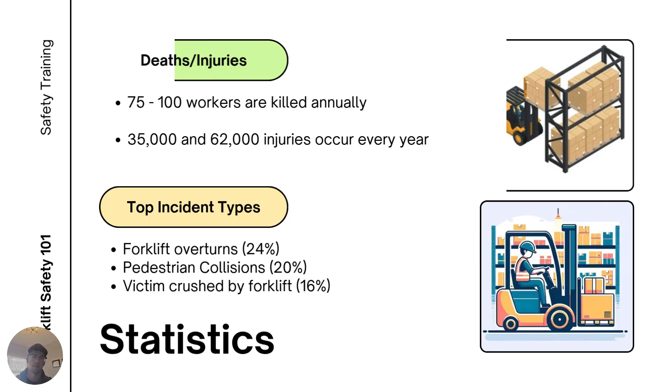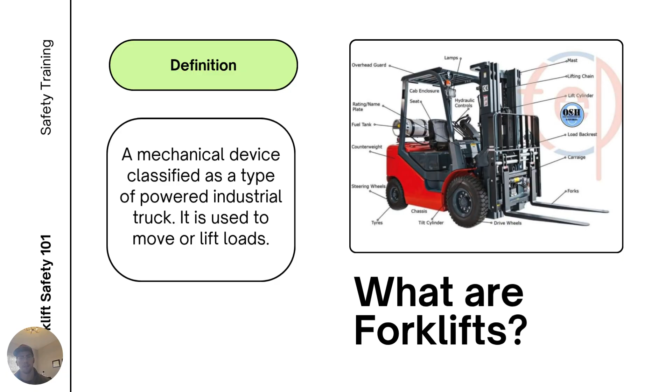So let's meet the warehouse workhorse, or the forklift, as we all know it. It's a powered industrial truck designed to lift, move, and stack heavy loads, saving backs and boosting efficiency. With forks, a mast, and serious lifting power, it's no toy. Forklifts can weigh more than a car and handle even heavier loads, so they demand respect and proper training. We'll cover the types, how they work, and how to operate them safely. No donuts and no demolition derbies.

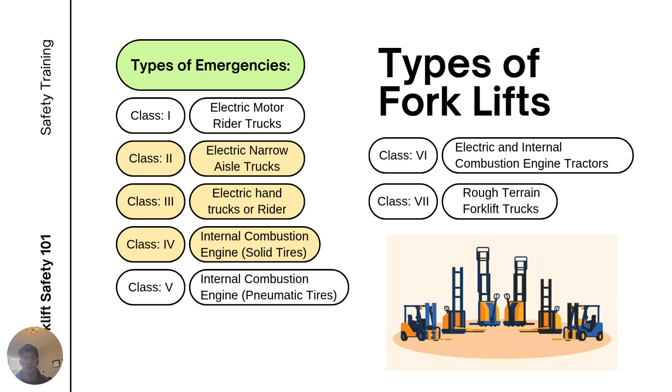Forklifts come in 7 classes, each built for specific tasks. Classes 1 through 3 include electric models for indoor use, riders, narrow aisle trucks, and pallet jacks. Classes 4 to 5 include internal combustion trucks, cushioned tires for indoors, and pneumatic for outdoor terrain. Classes 6 and 7 include tow tractors and rough terrain forklifts, built for pulling and rugged environments. For this training, though, we'll specifically focus on classes 2, 3, and 4. These are the types used across the Albion Dexter campus.

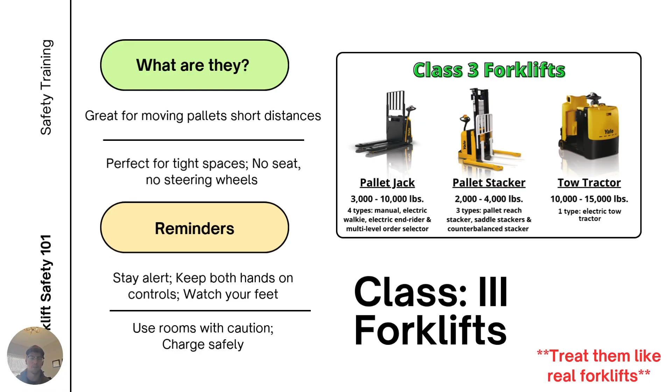Moving on to Class 3 forklifts, your low lift legends. Electric pallet jacks, or stackers, do the grunt work on the ground. They're great for moving pallets short distances, and perfect for tight spaces and indoor use. No seat typically, and no steering wheel, just walk behind or ride on. They're simple, efficient, and surprisingly strong for their size, kind of like the forklift version of a dependable sidekick. As a reminder, make sure you treat them like real forklifts. They may be small, but they can do a lot of the same things that the larger forklifts can also do.

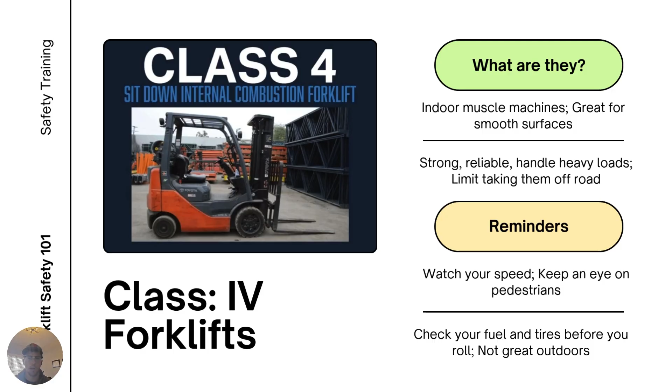The last one we'll deep dive is the Class 4 forklifts, your indoor muscle machines. They're powered by internal combustion and rolling on cushioned tires. Great for smooth surfaces like warehouse floors, strong, reliable, and built to handle heavy indoor loads. Just don't take them off-road unless the manufacturer says it's okay. Those cushioned tires aren't typically built for outside terrain. Think of them as a warehouse workhorse with a little engine growl, powerful but best kept inside.

Now, before operating, inspect your forklift every shift, no exceptions. OSHA requires it and keeps you and your team safe. Use the company checklist and operator manual for the lift to check key systems like brakes, horn, tires, and hydraulics. If something's leaking, broken, or making weird noises, report it. Don't fix it unless you're qualified.

Your inspection helps prevent accidents and keeps maintenance records up to date. So inspect before you wreck. It's the first step to a safe operation.

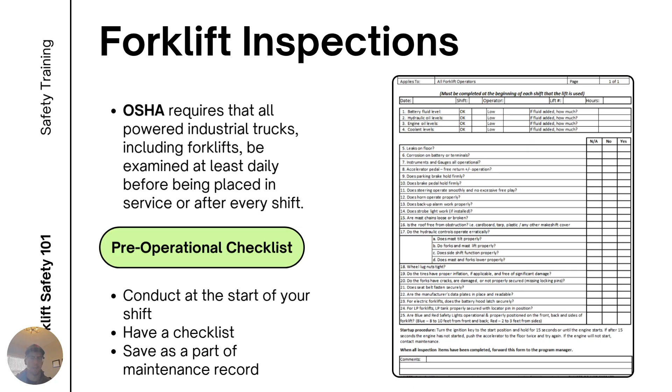Before getting in the seat, do a walk-around check, your first line of defense against breakdowns and accidents. Starting with the tires, look for damage or low pressure, especially on pneumatic types.

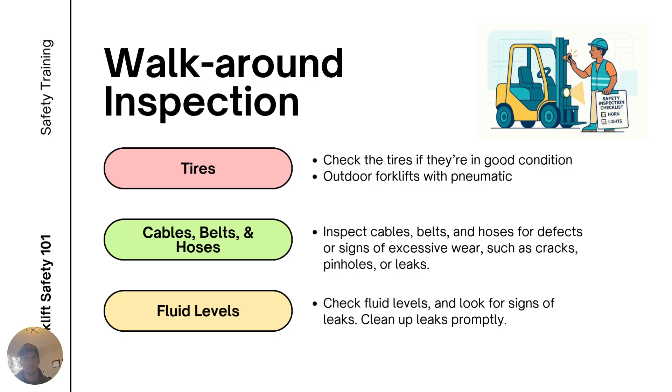Next, check cables, belts, hoses for cracks, leaks, or wear. And then fluids. Inspect oil, hydraulic fluid, and look for leaks under the forklift. If anything looks off, report it. Don't operate a forklift that's not 100%. Safety starts before the engine does.

Continuing on with the walk-around inspection, check the power source, whether it's gas, diesel, or electric. Check for leaks, wear, or loose connections. Strange smells or melting parts, report it immediately.

Inspect the forks, mast, backrest, and overhead guard for cracks, dents, or damage. These components do the heavy lifting and must be solid. Make sure the data plate and warning labels are clean and readable. If they're missing or obscured, that's a safety issue.

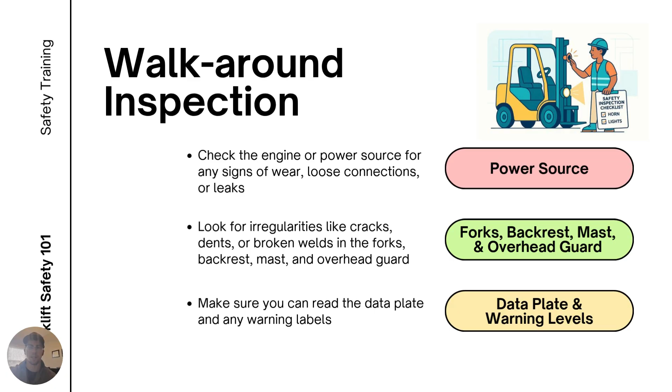So the bottom line is this inspection helps you catch problems early. Take it seriously, and yes, you can still look cool doing it.

After you walk around, hop in and buckle up. Seatbelt first. Make sure it latches securely and isn't damaged. Start the forklift while seated, then check gauges, warning lights, and fuel or battery levels.

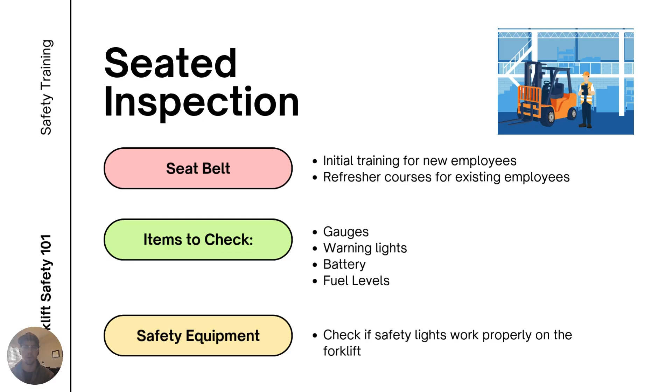Flashing lights aren't for decoration. They're telling you something's wrong. Test safety equipment like lights and alarms. If they're not working, you're invisible, and that's not safe in a busy warehouse.

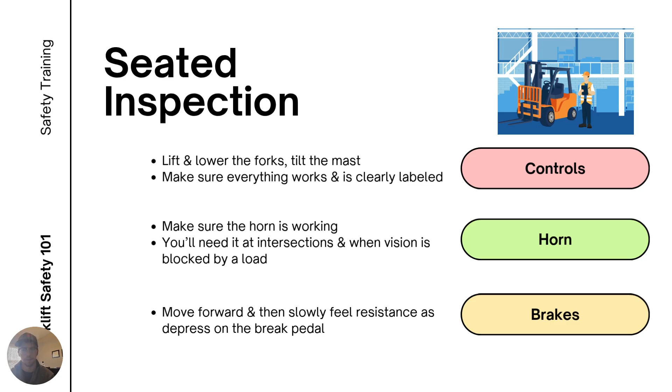Test the controls. Lift, lower, tilt. Make sure they respond smoothly. Labels should also be clear and easy to read. Check the horn. You'll need it for blind spots in busy areas. Make sure it works. Finally, test the brakes by moving forward and stopping. Should feel firm and reliable, not like a thrill ride.

Next, check the steering. It should feel smooth and responsive, not loose or stiff. Test the parking brake. Set controls for neutral and check the floor for any leaks. Puddles could mean hydraulic problems.

Inspect the exhaust system for sparks, smoke, or odd noises. Anything unusual, be sure to report it. If everything checks out, you're good to go. If not, tag it, keep it out of service. Safety first always.

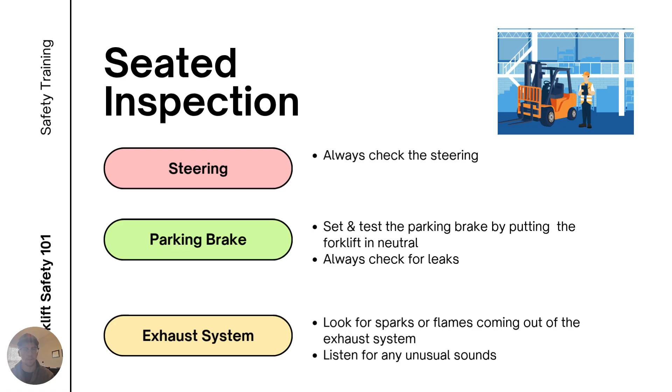Now, before lifting anything, follow these 3 essentials for safe forklift operation. First, wear PPE. Whether it's hard hat, safety glasses, steel toes, earplugs, whatever, make sure you're wearing what applies for your building. Whatever your site requires, it's protection, not a fashion statement.

Next, use 3 points of contact. Always have 3 limbs touching the forklift when you're getting on or off. Stay stable, stay safe. And then buckle up. Seatbelts save lives during rollovers. Click it every time you're in there. These basics prevent accidents and keep operations smooth. Skip them and you're inviting trouble.

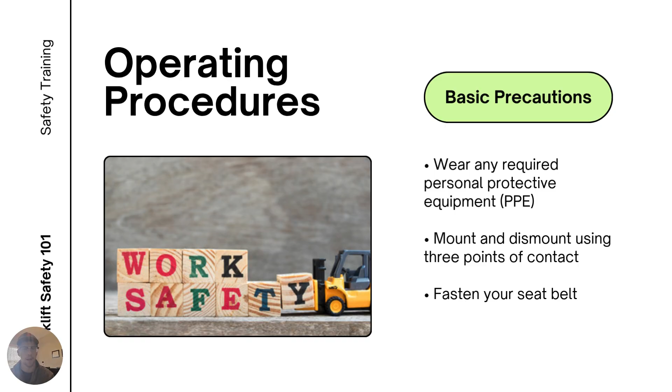Let's talk about how to drive a forklift like a pro, not like you're auditioning for a warehouse action movie. So the operation basics include steer with care. Rear wheel steering means take wide turns.

Know your data plate, which is pictured there on the top left. It tells you what your forklift can handle, amount of weight it can lift, how much it weighs itself, the size of your mast, a lot of different things.

Read the operator manual. Yes, really. This should be at all times stored on your lift. Always look where you're going, not where you hope to go. And keep a clear view of your path.

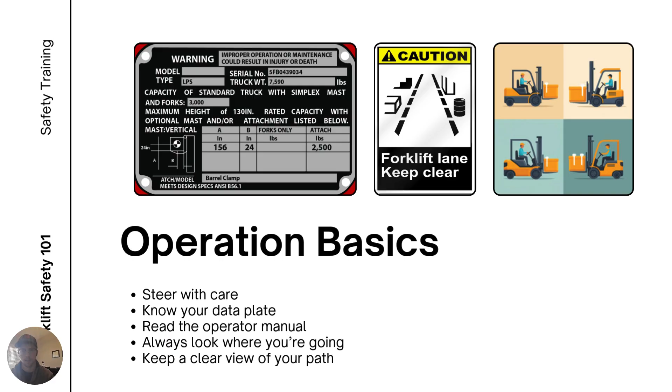No guessing games. Now let's look at driver guidelines. Keep arms, legs, and heads inside the forklift at all times. This is not a roller coaster. No stunt driving. Forklifts don't drift.

Your forklift and your coworkers will thank you.

Let's talk about keeping things upright, because tipping a forklift isn't on anybody's to-do list. So know your stability triangle. It's the invisible zone that keeps your forklift balanced. Stay inside it and you're golden.

Always keep the forks just a couple inches off the ground when carrying a load. High forks equal high risk. And remember, stable load means a stable forklift. If it looks sketchy, fix it before you move it. Balance isn't just for yoga, it's forklift survival.

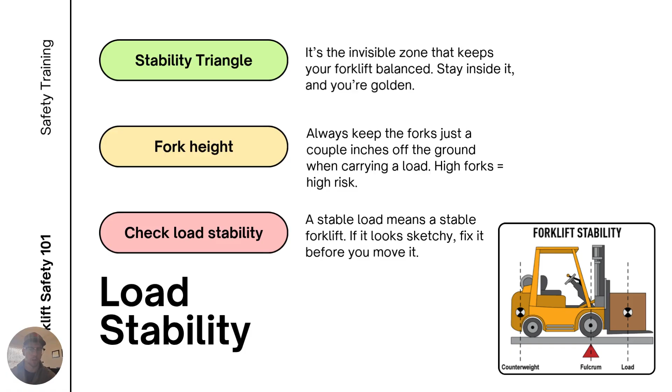Forklifts balance on a stability triangle. This is formed by the front wheels and the center of the rear axle. If the center of gravity stays inside that triangle, you're stable. If it shifts outside due to heavy loads, sharp turns, or ramps, tipping can happen.

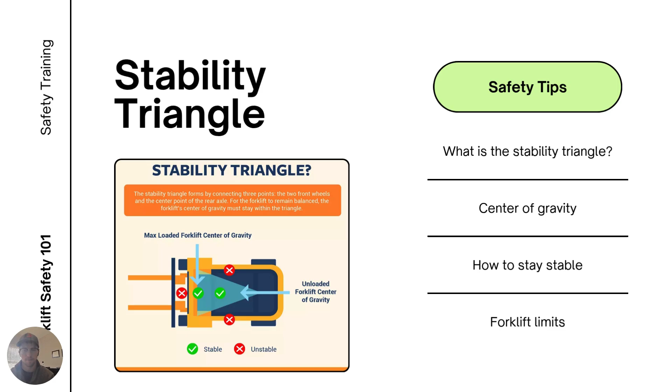Stay stable by keeping forks low while driving, centering and not overloading your load, avoiding sudden turns or rough surfaces, and knowing and respecting your forklift's limits. Stay inside the triangle, and then you stay upright.

Let's hope it never happens, but if your forklift happens to start tipping, here's what you need to do and what not to do. Wear your seatbelt, it's your lifeline. Hold the steering wheel tight with both hands, no flailing arms. Keep arms and legs inside the cage. Do not try to jump out.

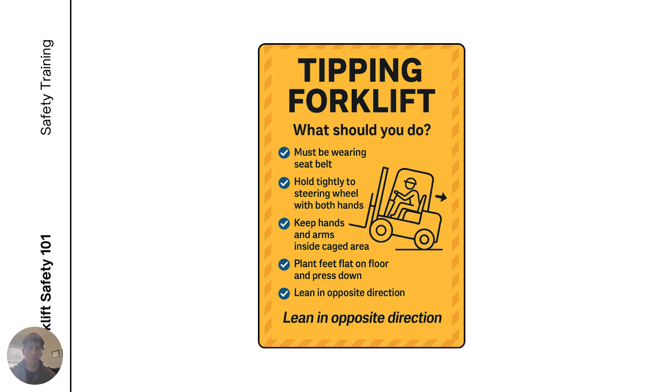Feet flat and press down. This allows you to brace yourself for impact. Lean away from the tip, shift your weight in the opposite direction to avoid contact with the ground. And remember, jumping out is the worst move.

Before you scoop up that pallet, know what you're doing with it, or know how to deal with it. A light balanced load is your best friend. A heavy off-center one, not so much. Check the weight, is it within your forklift's limits?

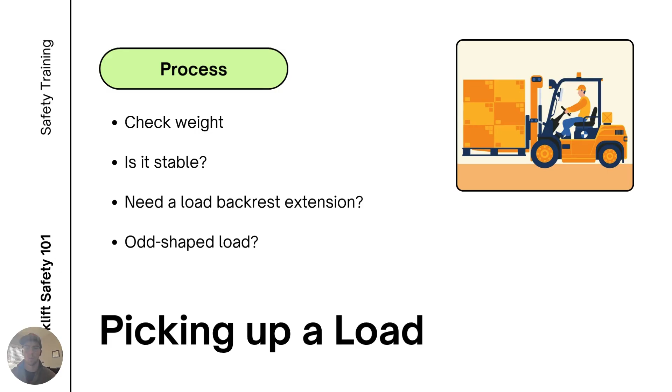Is it stable? If it's wobbly, restack it or wrap it up tight. Need a load backrest extension? Use one if there's any chance the load could fall backward. Odd-shaped load? Know how it's stacked and where it's going before you lift.

Now look up, seriously. Watch for pipes, lights, or anything that might not appreciate a surprise forklift hug. Forks wide and low, then slowly slide under the load. If it's stable, tilt it back and lift. If it's sketchy, lift a little first, then tilt gently.

Backing out of a rack, go slow and watch your surroundings. Once it's up, lower it to travel height, just a few inches off the ground. No need to parade it around like a trophy. And remember, smooth moves equals safe moves.

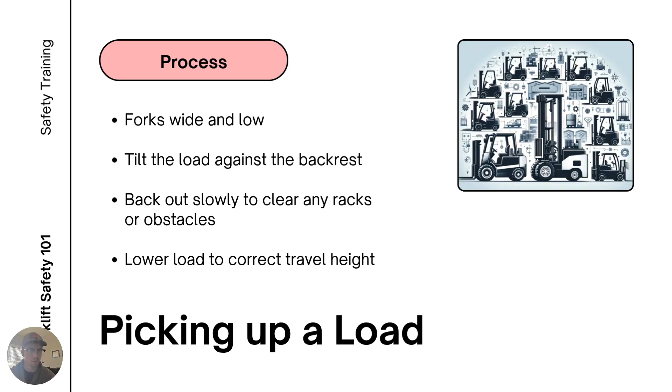Plan your route before moving. Watch for people, obstacles, and tight spaces. Stay alert and use mirrors and horns at blind spots. The golden rule here is keep the load low while traveling.

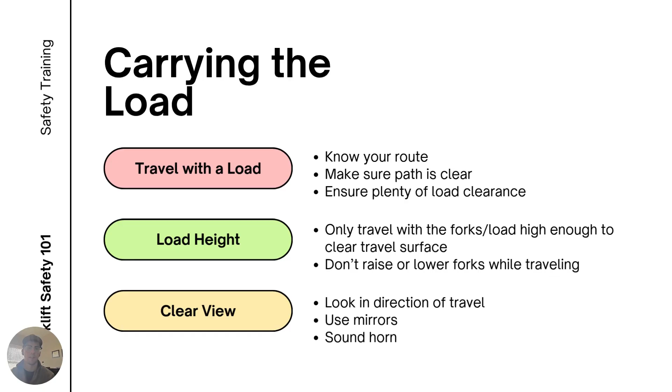Never raise or lower forks while driving. Always give pedestrians the right of way and drive smooth and steady. Safe handling means fewer surprises and fewer accidents.

If the load blocks your view, split it. Drive in reverse or use a spotter with clear hand signals. Forklifts steer from the rear, so give yourself space for wide turns. Steering in reverse works opposite. Go slow and stay in control.

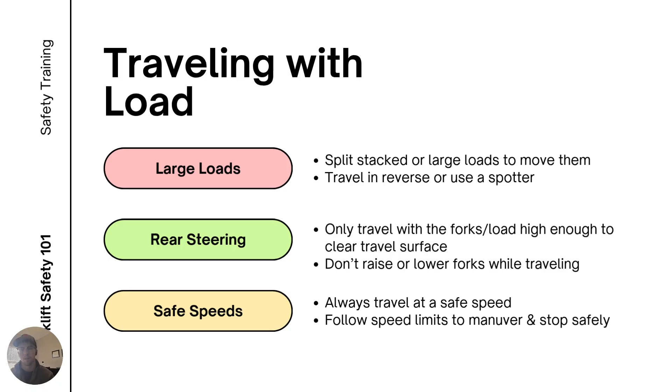Watch your speed. Drive cautiously over bumps and around others. You're moving a load, not racing a car. Smooth, steady, and alert, that's how you travel safely.

All right, ramps and inclines, where gravity likes to test your forklift skills. Going uphill, keep the load in front of you. Going downhill, keep the load behind you. Always drive in reverse down a ramp with the load, unless you enjoy chasing it. No turning on ramps, this isn't a stunt course.

Go slow, stay straight, and keep your forks low to the ground. And if the ramp is slick, steep, or sketchy, don't risk it. Find another route or get help. Forklifts are not mountain goats.

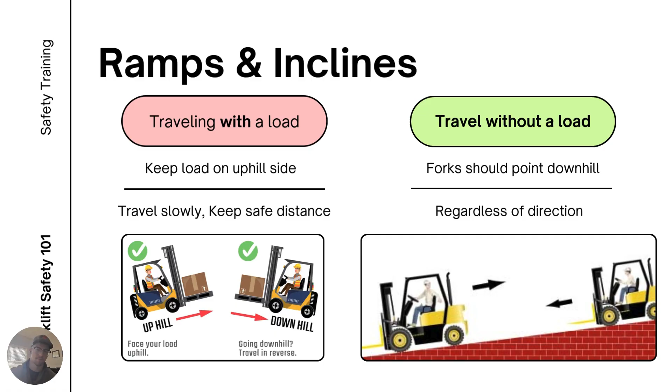Before entering trucks, trailers, or containers, always secure the vehicle to prevent movement. Stabilize with chocks or jacks. Inspect for damage or weak flooring. Enter load first for better control.

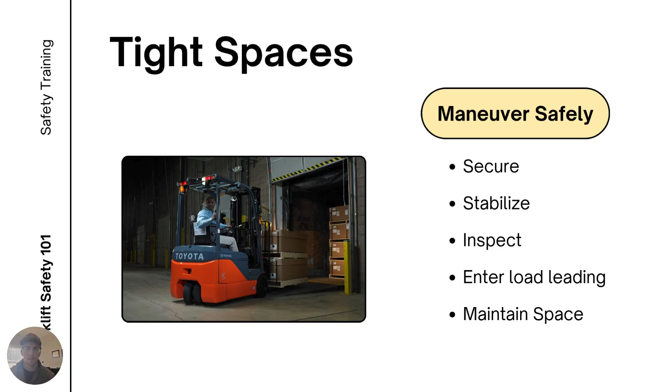Maintain space to maneuver safely. Monitor conditions, take breaks if it's hot or cramped. Tight spaces demand full focus, no shortcuts, no risky moves.

Operating a forklift is like driving through a video game level. Hazards pop up everywhere, so you've got to stay alert. Here are some hazards you need to watch out for.

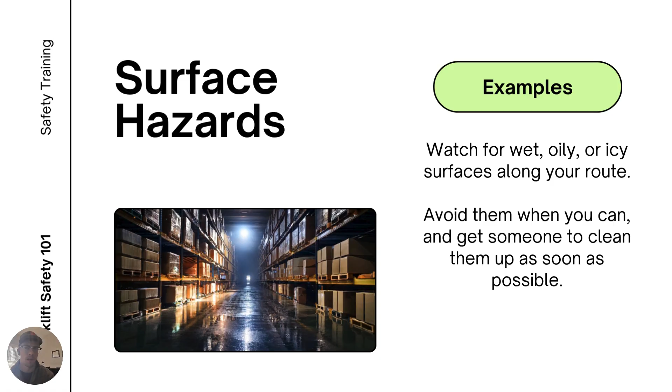Slippery surfaces, wet, oily, or icy, avoid them or get them cleared ASAP. Loose objects, bumps, or dips, these can mess with your steering or even tip the forklift over. Not fun.

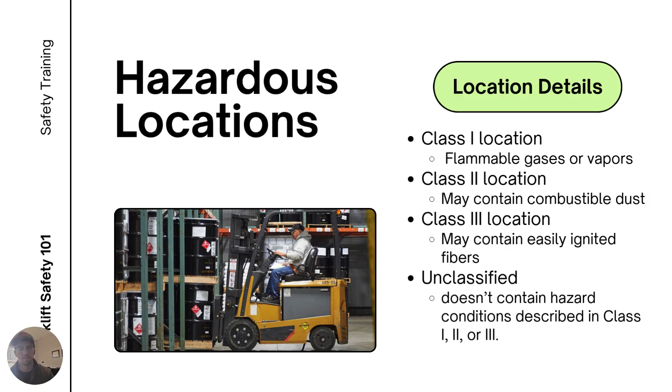Hazardous areas or locations. If chemicals are around, make sure your forklift is rated for the job. Know your class and division. No sparks in flammable zones, please. Railroad tracks: be sure to cross them at a 45-degree angle to avoid getting stuck or bounced around.

Another hazard is other forklifts. Keep at least 3 forklift lengths between you and the next driver. No tailgating.

Pedestrians: always yield to pedestrians. Never approach someone head on, especially near walls or racks. You don't want to be that guy that causes a serious issue.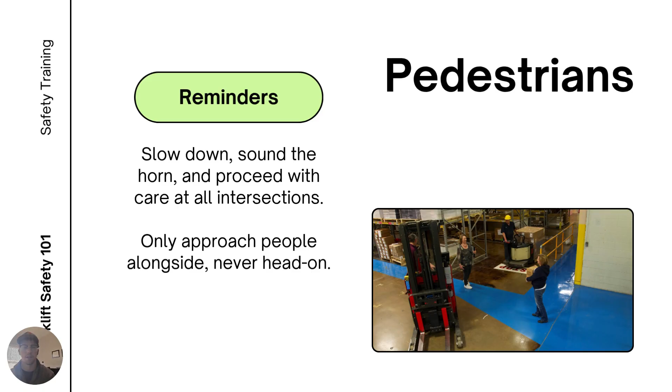All right, time to land the load like a pro. The goal: safe, stable, and not leaning like it's trying to start a conversation.

Check the surface. Flat and sturdy is the name of the game. Stacking pallets, make sure the bottom one isn't busted. And never put the heavy stuff on top of the light stuff. This is not Jenga. Using a rack or loft, inspect it first. Bent beams or broken decking, don't risk it. Be sure to report it.

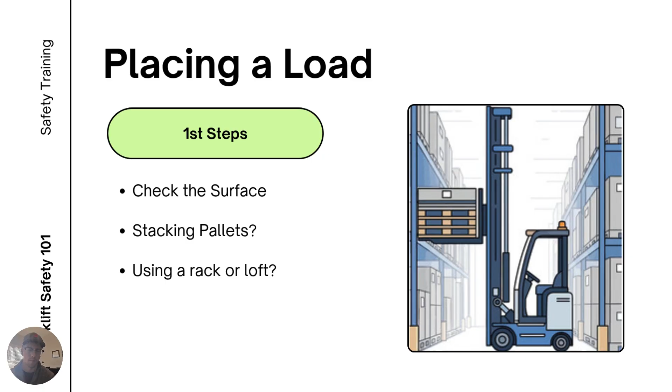So here's the step-by-step for placing a load. 1, stop in front of the spot. 2, raise the load slowly to the right height. 3, ease forward with the load up. 4, tilt forward to level it out. 5, place it square and straight.

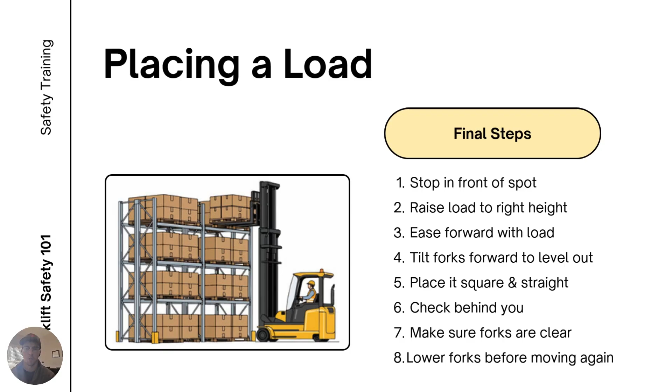6, check behind you, you don't want any surprise guests. Then back out slowly. 7, make sure the forks are clear before turning or lowering. And 8, lower the forks before moving again. No jousting.

All right, you've done the work. Now let's park this beast the right way. Pick a safe spot out of traffic, out of the way, and on level ground.

Lower the forks all the way down. No tripping hazards, no toe smashers. Neutral gear, parking brake on, and key off, in that order. If it's an electric forklift, disconnect the power or plug it into the charger. And hey, don't block fire exits, eye wash stations, or anything with a big red sign.

Think of it like putting your forklift to bed. Safe, secure, and not in anyone's way.

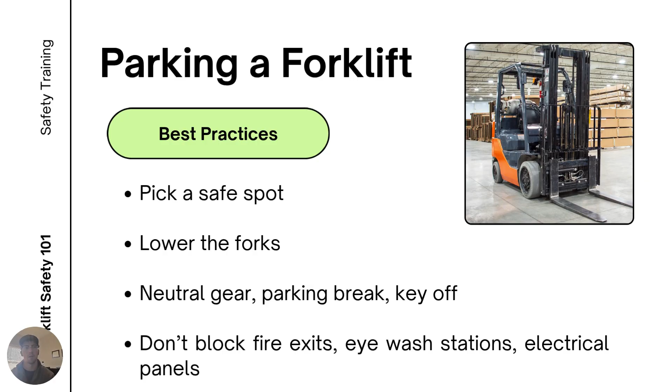If you happen to be stepping away from your forklift: if you're within 25 feet and in view, the forks down, controls in neutral, and the parking brake is set. If you are beyond 25 feet or it's out of sight, shut it off.

No exceptions. It's usually safer to turn it off anyway. And always follow company policy for key management. No leaving keys in the ignition.

Forklifts, like people, run better with regular checkups. A little TLC goes a long way. So fewer breakdowns, longer life. And hey, better resale value if we ever part ways.

Stick to the manufacturer's maintenance and lube schedule. It's not optional, it's smart. Keep records, not just for the paperwork gods, but for tracking performance and issues.

When we get a new forklift, maintenance does a full inspection, kind of like a welcome party, but with tools. They follow the operator manual to the letter, no guessing, no shortcuts. The bottom line here: take care of your forklift, and it'll take care of you.

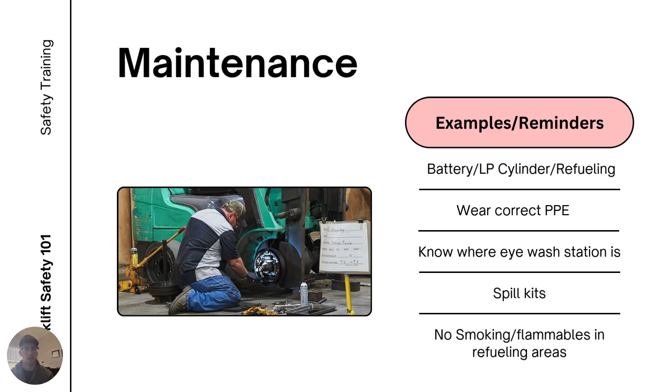It's about that time to swap out the LP cylinder. Safely, of course. So here's the quick and clean way to do it.

1, park the forklift and leave the engine running, for now. 2, gloves on. Propane isn't a hand moisturizer, so be sure to wear those special gloves to protect them. 3, close the cylinder valve to eliminate potential leaks and drama, of course. 4, run the engine until it stops.

It burns off leftover gas during this process. 5, turn off the ignition. Now it's nap time. 6, disconnect the hose and straps, gently, not like you're opening a soda.

7, remove the empty cylinder. Lift with care, not flare. 8, install the new cylinder. Line it up right. And 9, reconnect, tighten, and check for leaks. There should be no hissing sounds.

And that's it. Quick, safe, and no explosions. Just how we like it.

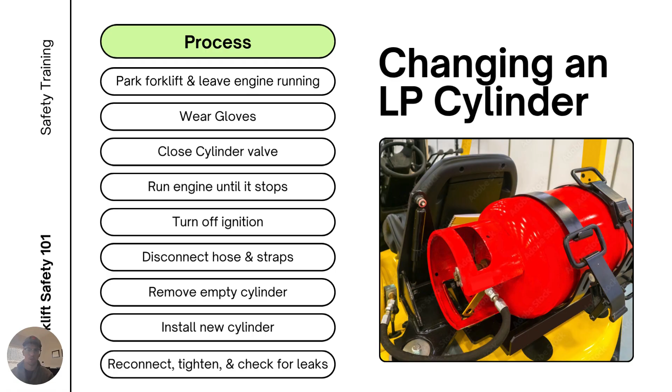So now, if an LP valve leaks, if you smell propane or hear a hiss, don't panic. But don't ignore it either. Here's the quick fix checklist.

1, tighten the nuts. Sometimes it's just a loose connection. Or swap the cylinder, if it's still leaking, grab a fresh one. And if that doesn't work, check the hose. If it's cracked or damaged, repair or replace it immediately.

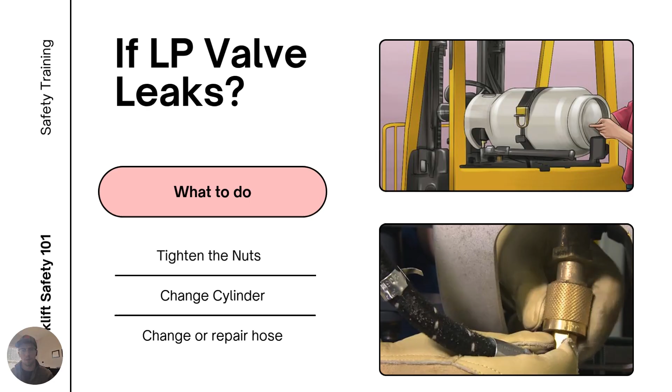No guessing, no duct tape. Solutions: if it's leaking, fix it right. Or get someone who can.

Thinking about adding a cup holder or turbo booster to your forklift? Please hold that thought. No mods allowed unless they've been approved by the manufacturer and the company. That includes attachments, gadgets, or anything that changes how the forklift operates. Even small changes can mess with load capacity, stability, or safety systems. And that's a recipe for disaster.

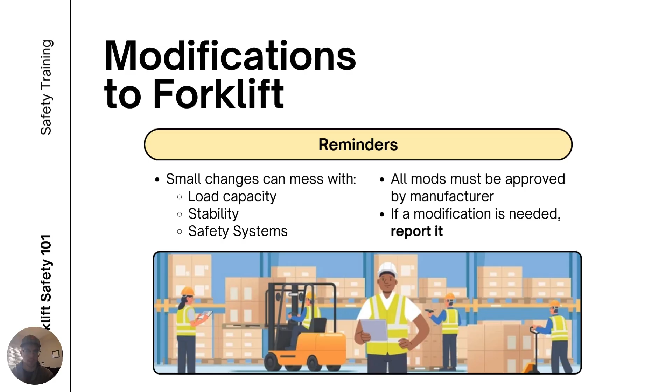If you think a modification is needed, report it. Let the pros handle the approval process.

You've now completed forklift training. Here's what you've learned. Forklifts are powerful tools, not toys. Inspections, walk around and seated, are essential before use. Safe operation means smooth driving, proper load handling, and hazard awareness. Stability matters, stay inside the triangle.

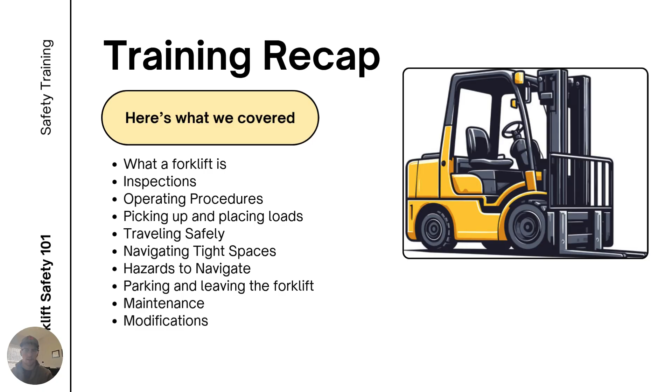Travel carefully, especially in tight spaces and around pedestrians. Park properly and maintain your equipment. Handle LP cylinders safely and avoid unauthorized modifications. Safety is a mindset. Stay alert, follow procedures, and keep the warehouse safe.

Forklift safety comes down to staying alert, following procedures, and respecting the equipment. From inspections to load handling and hazard awareness, every step matters. Take care of your forklift, operate it responsibly, and always put safety first, because one mistake can have serious consequences.